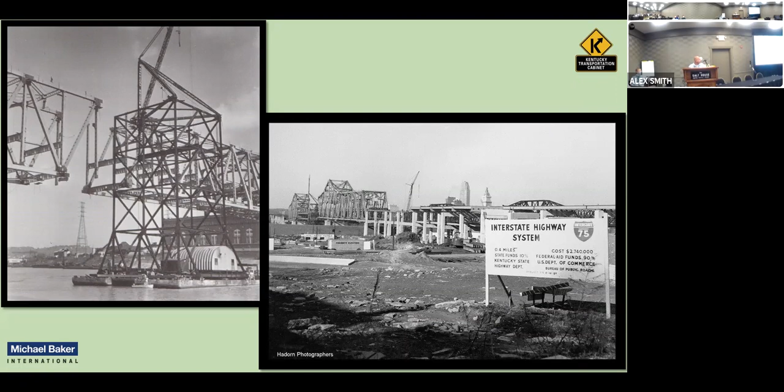A little history on the bridge: this is I-75 over the Ohio River between Covington and Cincinnati. Opened in November 1963, it is a steel cantilever truss with riveted construction, 4 lanes of traffic, top and bottom deck, carries about 160,000 vehicles a day. It is a big piece of infrastructure for probably the whole eastern United States.

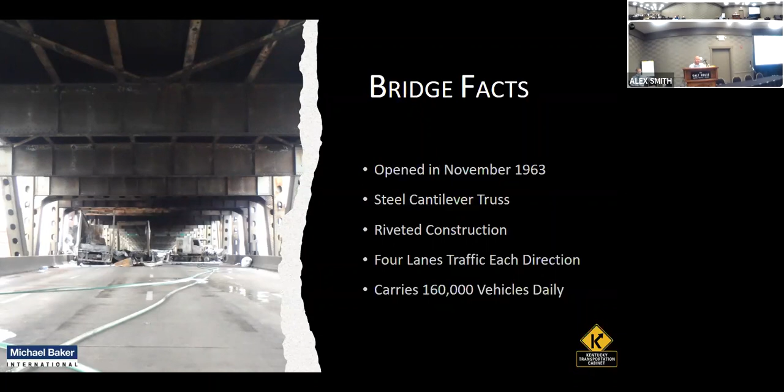So, pretty special bridge. The fire limits - we focused mainly on 4 to 5 panel points. Incident limits on the upper deck were between around L16 prime and L20 prime, as well as on the lower deck. That just shows you a typical elevation view of the bridge, top and bottom deck.

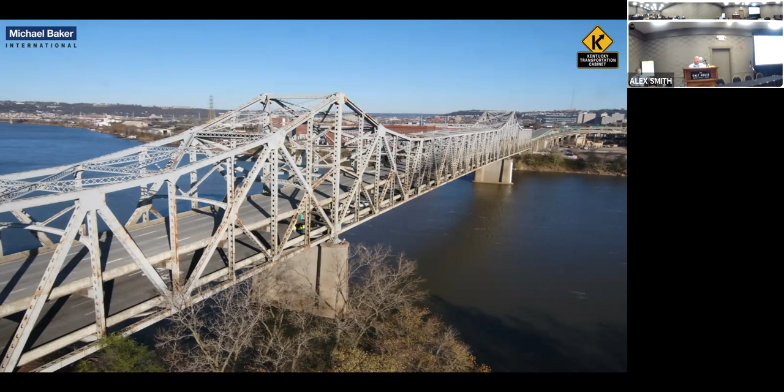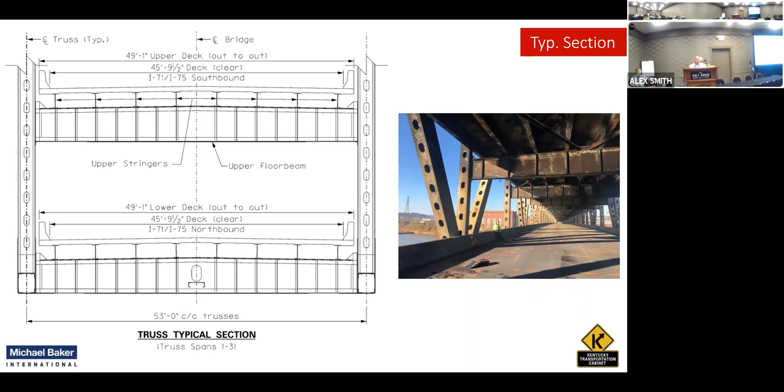We did utilize UAS inspections during this, which was very, very beneficial. Here's a typical section, floor beam, top and bottom deck, about 49 feet out on the deck, and like I said it's 4 lanes. Let me try to see it.

So we knew when this crash occurred, we had to act quickly. When the governor and I spoke on Wednesday before the press conference, he said, Jim, we want to get this job done and we want to get it done quickly, but it's got to be done safely. And that became a touchstone for the entire project.

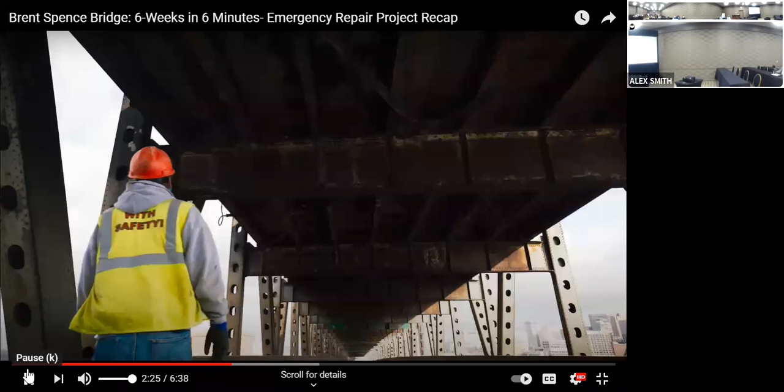We sourced these steel beams from 4 different mills in the country. The contractors visited the site to examine it on Saturday and Sunday, and they gave us a price on Monday morning. Right now, the other bridges are having to shoulder the load that Brent Spence Bridge usually handles.

The traffic control is a major part of a project. If this were a scheduled project where we were going to replace a portion of the deck on the Brent Spence Bridge, we would have taken months to determine the traffic patterns.

We had hours. We contacted Bob Yeager, our chief district engineer from the state highway department, and he helped us coordinate state resources to get out there with directional signage, crash trucks, and he came out there and helped us facilitate the detour around the 275, 471 corridor.

I'd say there were 3 projects in my mind. There was the bridge inspection and repair project, there was the traffic maintenance project, and there was the communication project. My role was to oversee all 3 of those and make sure that information was shared not only within, but between each of the groups so that we could coordinate them.

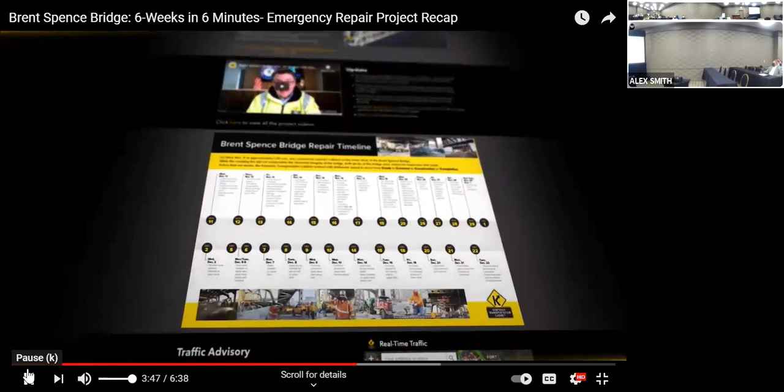The Brent Spence Bridge is such a nationally prevalent bridge, there were people even beyond the local area that needed to know what was going on. We established a dedicated website and made an effort to put out consistent visual content so that people would know exactly what was happening on the bridge. They could track along with us, and they needed to know how else to keep crossing the Ohio River.

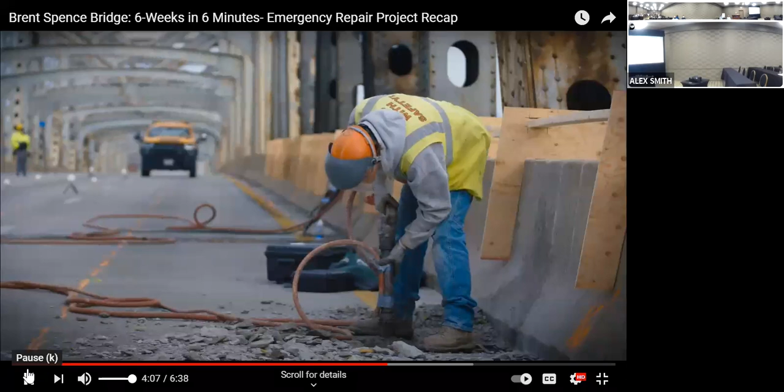It wasn't a complex project, but the conditions were complex. The removal of roughly 8,000 square feet of concrete, removal of these steel beams, the replacement of them, the replacement of the barrier walls, but it was under a very constrained, very demanding schedule on a tough site.

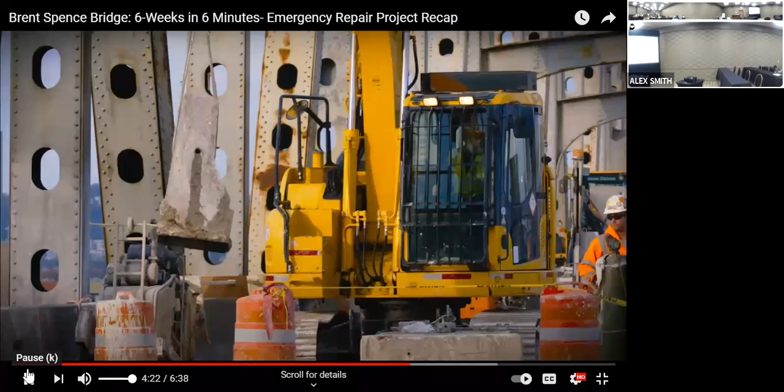Throughout the construction process, a lot of people were saying, well, I'm never gonna drive across that bridge, I didn't trust it before, I'm not gonna trust it now. I think the structural integrity of that bridge was ever proven during this event, because they went in and basically surgically removed the damaged portion of the upper deck of that bridge, and the rest of the structure remained intact and stood there. It was very obviously structurally sound.

What impressed me the most was the expediency and the effort and the cooperation that we got at all levels. Working with two states, trying to get something done would typically take at least a few conversations. Everybody was on board, not asking why, but how. How can I help?

The plans for the Brent Spence are not to remove the current Brent Spence, but to build a companion bridge to the west. It needs some relief, but it's really a capacity issue.

We were surprised by the response that we got opening day. People really appreciated the work that was done. It was more than just getting the bridge back open, but I think they really appreciated the people and the sacrifice that it took to get it open early and that it was going to be safe.

Thinking about all of the things that we were able to accomplish in 6 weeks, all of that's kind of replaying in your mind as you drive through it. Just a relief that this is real, that it really happened. We were able to get it accomplished, and pride.

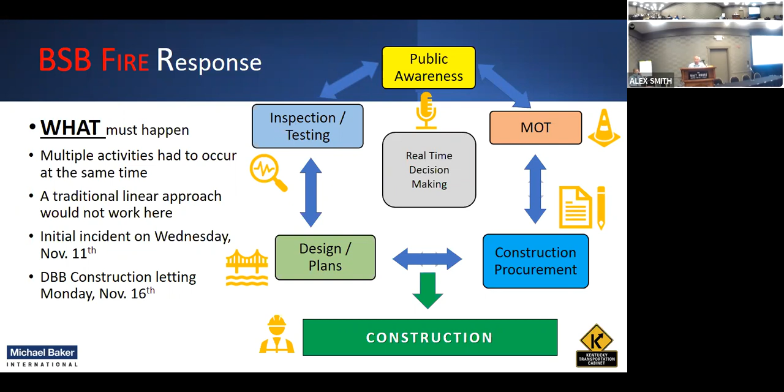Initial impressions — I got a call around 8:30 Veterans Day morning. Nick Rice, our District 6 bridge engineer, called me. He says, 'Josh, you seen the news?' I said, 'Nick, it's Veterans Day, I'm not watching the news.' He said, 'Well, the Brent Spence is on fire.' I said, 'Well, how bad is it?' He goes, 'You may want to get up there.' So I got up there about 9:30, of course being in Boone County. And it was a mess.

We had two jackknifed semi-trucks that collided on the bridge and caught on fire. The lower deck was damaged, and of course we expected replacement. Significant removal was required of that debris — it took a whole day to get all of it out. The smell alone, Jason can remind me of this too, was horrible — burnt tires, burnt metal. I don't even remember what they were carrying, it wasn't much, but it took forever to get the deck cleaned. It took all that first day, Veterans Day.

It even went into the night to get that deck cleaned and all that debris moved, so we could even start the inspection.

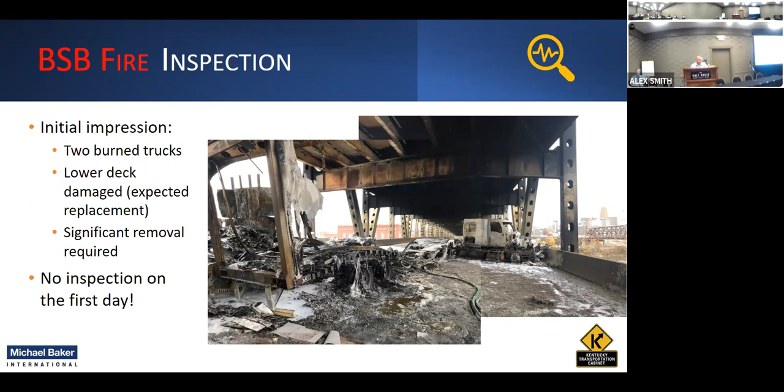That actual night we sat around late trying to work up how we were going to tackle this thing. I called Michael Baker, and we all sat down at some restaurant that night and started planning what we'd have to do. We knew this was an emergency inspection, but it wasn't the same as a typical special inspection or fracture critical inspection either.

Several factors came to mind: priority one was safety — safe for pedestrians, safe for us to even be on the deck to inspect, let alone safe for traffic to cross it. Priority two was taking those inspection results and determining what needed to be repaired, replaced, or fixed. Late that night we just grabbed some napkins and a pen and started writing stuff down.

So HAZ — that's the heat affected zone, the acronym we determined. We had a pretty good location of where the fire was, so that was our main concern, looking at those fire limits. But of course, on the upper deck and lower deck, we were looking for typical concrete deterioration, delaminations, and cracks in concrete. Floor beams, of course primary structural members, were a big concern, along with the stringers and truss members. There are pin hangers on this bridge, and even the finger joints — L17 prime was right at the suspended span, right at the finger joint.

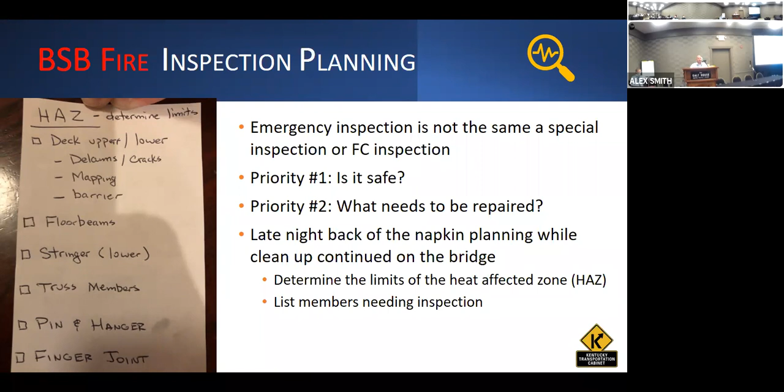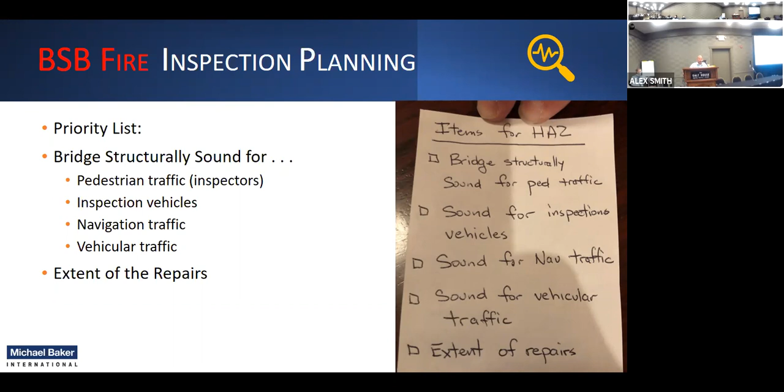Our priority list, like I mentioned, we wanted to make sure the bridge was structurally sound, not only for pedestrians, us being on the deck to inspect and do our work, but also navigation traffic. We shut down navigation traffic because we didn't know if this bridge was going to fall within 10 minutes or it wasn't going to fall. So navigation traffic was shut down. Of course, vehicular traffic was our big concern as well, and the extent of the repairs.

Talk a little bit about what it took to get this done so fast from an inspection side. So when I got there on Veterans Day, I was already thinking, this is going to be a challenge to get this actually inspected and find the results that we need to move forward to replace and fix.

Big shout out to all the consultants I called. It was Burgess and Niple, Palmer was there, of course Michael Baker, Stantec. I think at one point we had about 20 bridge inspectors on site, on this bridge from end to end. So this was a special emergency inspection.

We wanted to mainly focus on that heat affected zone, but also we knew it wouldn't hurt to look at this whole bridge since we didn't know what else was going on with it. So we had 4 teams of 2 inspectors, looking at the lower chord, the upper chord, and of course looking at movement of bearings and wind locks, anything that could have been affected from this fire. We started at the end and worked toward that panel point 17. We knew that's where the truck was.

We developed and organized inspection teams and packets. Every morning I met with all the team leaders at 8 o'clock just to go over previous day results. During the whole day, I was on the phone trying to manage all the inspection teams, and I was talking to upper management.

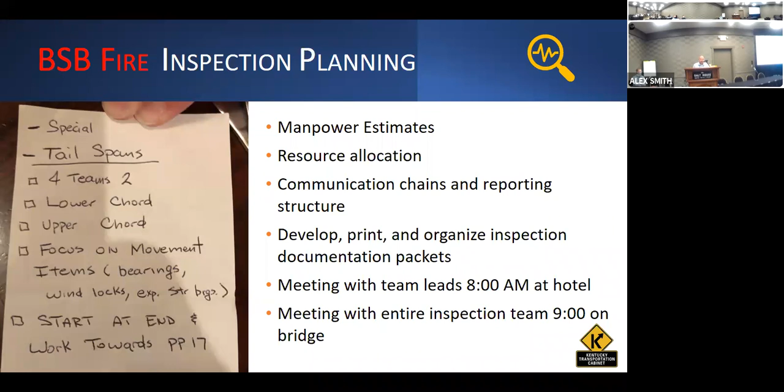From the inspection standpoint, what were we looking for? Paint charring from the heat, from the fire, concrete, buckled members, and of course joints, bearings, and wind locks, and that kind of stuff. So primarily a visual inspection, but then we did incorporate material testing that we'll get into here in a bit.

So we did obtain steel core coupons, concrete cores of the deck within the heat affected zone, and also non-destructive testing at additional locations within the heat affected zone, and control samples outside the heat affected zone. We took core samples of steel and concrete to get a baseline. I think Jason will get into that in a bit.

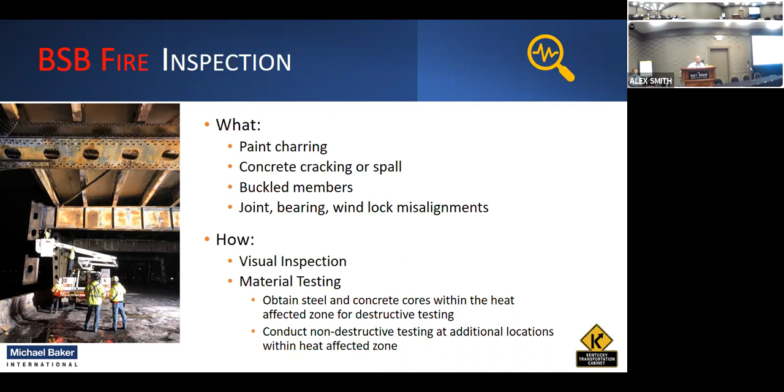So on the lower deck, we took 6 cores. That assisted us in defining what the limits of that heat affected zone were. But it also helped us determine the depth of the overlay and location of the steel in the deck.

One of the lessons learned from those concrete cores, we took cores right down the center line, and looking back, we probably would have wanted to take some along the gutter line, because that overlay thickness did change toward that gutter line. It wasn't a constant thickness.

So the concrete deck and the lower deck was not compromised, even though it looked like crap. The fire pretty much just peeled up the overlay. So we knew the lower deck was pretty good shape. The upper deck didn't turn out to be that case.

We took 8 cores again along the center line to test for those compression strengths. That assisted in defining those repairs, determining the depth. The upper deck was heavily damaged.

I remember like day 2, we were out there, maybe day 1, I can't remember. They were still washing off the top of the deck to remove all the debris, the emergency services, fire department. And it sounded like, it even looked like rain coming down through the deck.

Water was just percolating right through the deck. It looked like a thunderstorm coming through there. So we knew that upper deck was compromised. It was just water pouring right through. So it was heavily damaged, and we knew it had to be replaced.

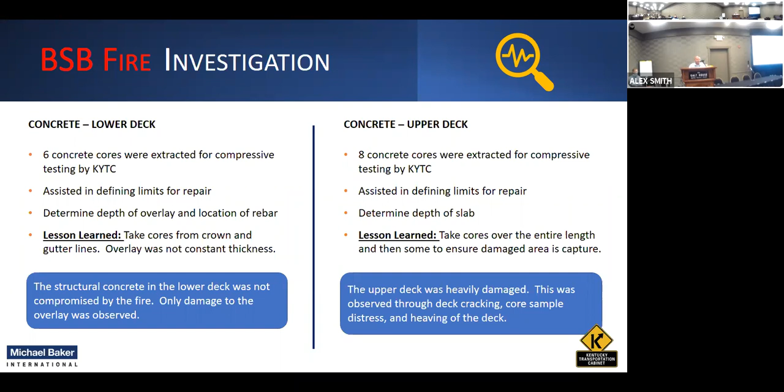Of course, concern was the fire and what it did to the steel, what it did to the concrete, what the strength of that steel came out to be, or what it was after that. Of course, we knew there was a rapid decrease in that yield strength depending on how hot that fire got, and the inability to carry the dead loads at elevated temperatures. Quenching of the steel was our biggest concern, because we did not want that to form martensite, which makes that steel really brittle. And once it gets brittle, it can crack like glass. So that was our biggest concern.

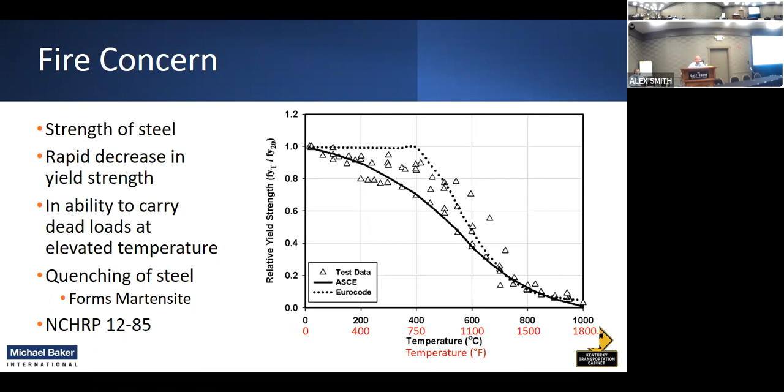So yeah, fire concern again. What's the source? What's the temperature? How long did it happen? And where's it at, you know, proximity? This is one of the fires that happened on I-85, and it actually collapsed one of the spans right there. So depending on the duration of the fire and how hot it gets, it can be a big issue.

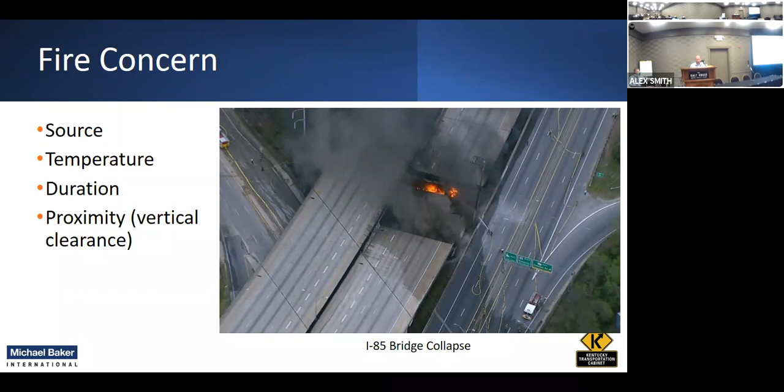So after we did our inspection, we did some metallurgy analysis and took those steel core samples. Luckily, we did not see any change in steel properties because of the fire. Looks like it did get below about 1,200 degrees. So that's a maximum reduction in strength, 10% for hotter fires. And then we could reuse it if distortion's not too severe, with 90% of yield strength.

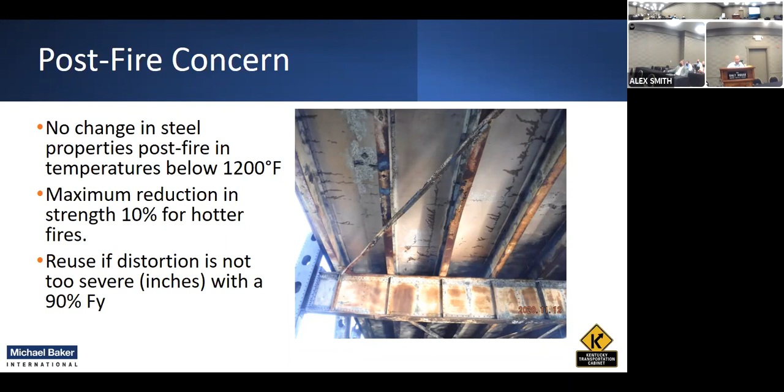This is just a little PennDOT study we wanted to add in here. It talks about the effects of fire damage on bridge steel. Several pictures there: before the fire in the bottom left corner, after the fire at 800 degrees, and then washing the surface, brushing the surface is also included. So it's a pretty good guide for post-fire inspection.

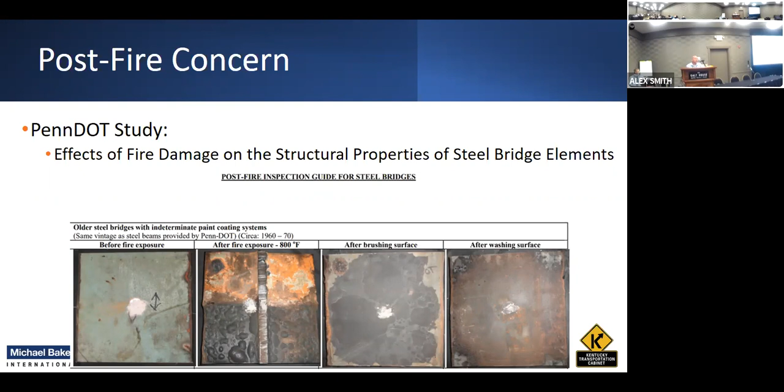So all in all, after our inspection, prior to the incident, we had the bridge rated all 5s on the deck, super, and sub. But we knew there were still some issues with that steel because it was a fire, it still got hot. So we ended up taking the deck and super to a 1 imminent condition for an NBI rating. And we thought that was pretty fair considering what we were seeing.

Of course, we did inspect all the steel members for heat damage, distortion, that kind of stuff. And as I mentioned, the inspection access we had involved over 20 people, including KYTC and consultants. It was a big hands-on deck.

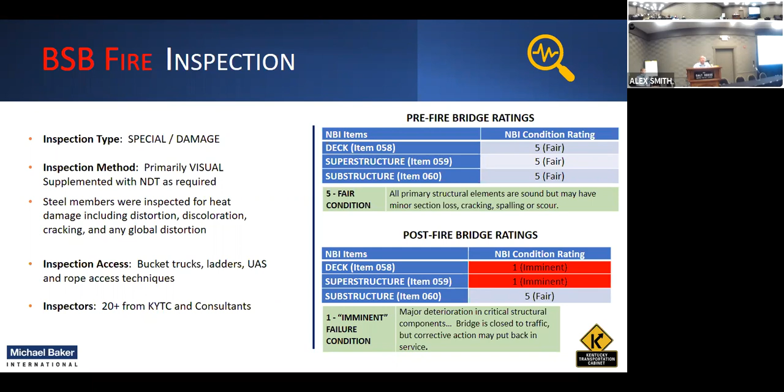So one of the things I think that was pretty interesting, even with everybody out there, consultants and KYTC alike, and I think even the public, they knew this was a big deal. Everybody put their heart and soul into it, put our blood and sweat into it. This was a big concern, and everybody wanted to get this thing inspected, analyzed, and repaired as fast, safely, and efficiently as possible. So it was all hands on deck.

So I think I'm going to turn it over to Jason here real quick, and he's going to talk about the investigation.

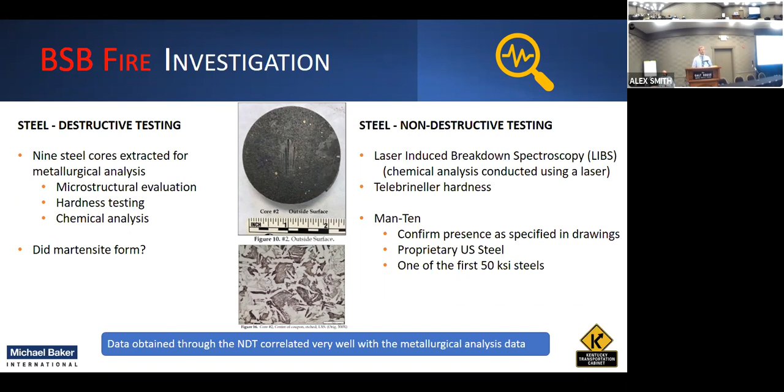To look at that, we did some Brinell hardness testing, seeing if there was a change in hardness, as well as using a laser-induced breakdown spectrometer. Essentially, you shoot a laser and it gives you a readout of the chemical composition of the steel, confirming whether we had this high manganese content and whether it actually was this Man-Ten steel. All of that was confirmed, and it was some interesting data that we produced.

One of the other stories I'd like to spend time on today is about one particular core. In the process of taking these cores out, an interesting thing occurred, actually in the hanger. Josh mentioned that this occurred at L-17, and this bridge has a suspended span, 450 feet over the river, held up by hangers, large structural members on each side of the bridge.

Those hangers have about 5 million pounds in them holding this thing up. While they took the core out of the cover plate for this big box section that's the hanger, a notch, or crack indication, was noted after the core came out. Talking to people, we went through and looked at it, tried to take some pictures, you can see a little bit of it there.

So there was an immediate concern. Why did this little notch occur? Why did this crack occur in the steel? Was this overly brittle? Is this thing going to propagate? Do we have additional issues from this fire that we don't understand? The people doing the drilling have done this many, many times over their careers, and they've never had a notch or crack pop out like this. We're still not sure exactly what happened here, but it was of major concern to us when this happened.

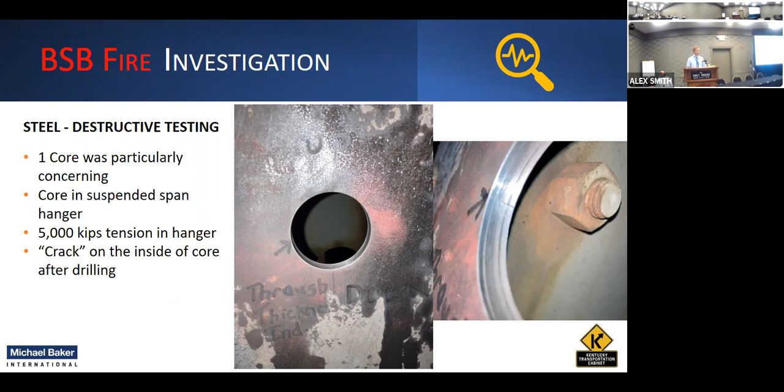It caused us to ask, are we in danger of having this entire hanger fracture, or something else occurring that we need to be more cautious of? We actually went back and shut river traffic down, on the account that we could drop this suspended span if this hanger were to fracture.

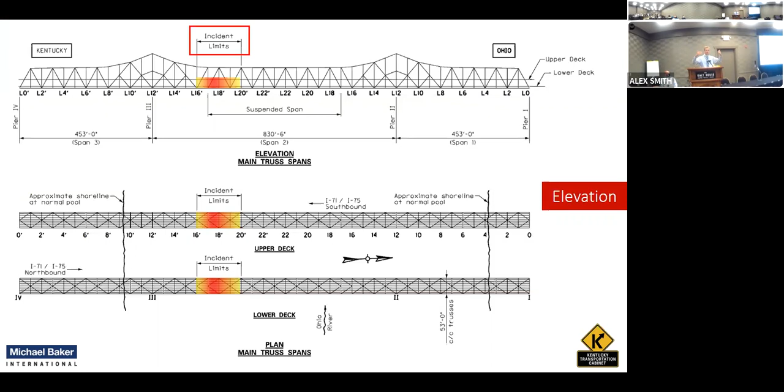Showing this picture that Josh showed before, you'll see that suspended span in the middle of the river. The heat effect from the fire occurred right in the middle of this thing, and the concern was that suspended span would fall. It's a simple span portion of the construction — cantilevers built out from the sides in the original construction, with that suspended span placed in the middle.

So what we did is we took these steel cores and they ended up making a steel puck. We brought them back down to Louisville here, where there's a testing facility. They cut small slivers of that steel out and made a puck that was about a 1 inch diameter.

There's a black medium of plastic that goes in there, and they polish this thing down. The polishing process was pretty fascinating.

When they grind and polish this thing down to the microns, they have a polishing cloth, but the liquid they drop in there has different diameter diamond bits. They'd have like 3 micron diamonds suspended in a solution and rub this thing with it. Then they cleaned it all up and finally got down to 1 micron diamond dust, grinding this thing down to a glass finish and put it underneath the microscope.

They were able to say, hey, there is still some paint on this sample. That essentially tells them that the fire didn't get above that 1200 degree threshold, at which point the fire would burn off the paint on the bridge. Since there was still a little sliver of paint left, that gave an indication to the metallurgists of the temperature the fire reached in that portion.

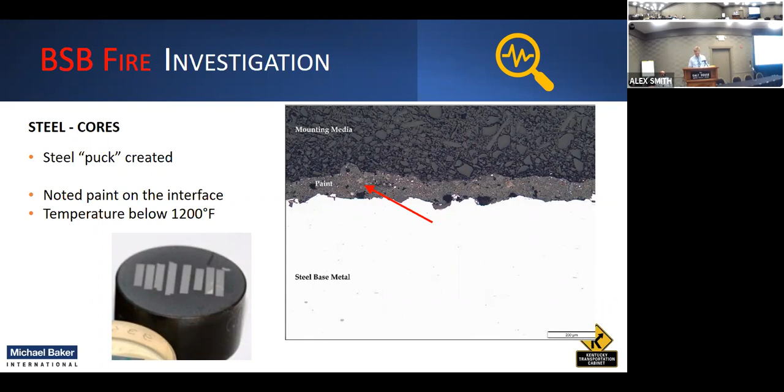So everybody who knew what they were talking about was happy and said, oh, we didn't have a change in steel. The structural properties haven't changed, and we shouldn't have a concern. At that point, we were happy.

We could then go back and report up the chain that whatever that little notch or indication was, it was an anomaly. They went and cleaned it up. We do not have a concern that they changed the properties of the structure, and they could reopen it to river traffic. There's as much commerce running underneath this bridge as over the top of it, which is a major concern for all parties involved.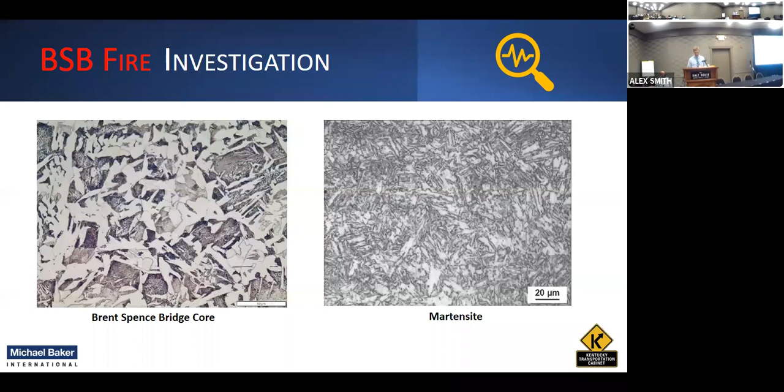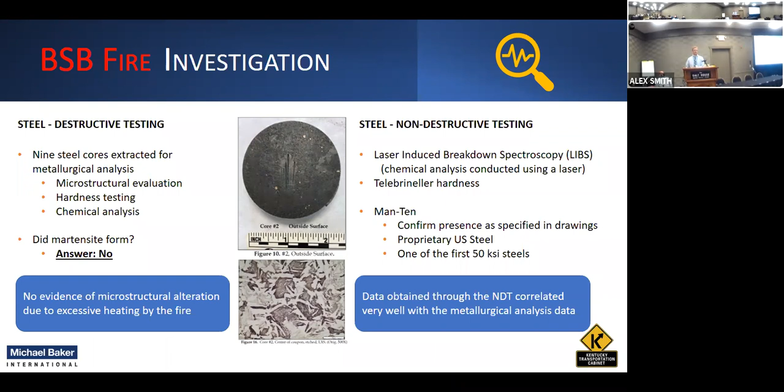So that was kind of the story of the steel and how that occurred. In the end, we did not have martensite form, and there was no evidence of the structure altered due to excessive heat. So the project was able to progress forward from the inspection side, saying, hey, this is where we're at, and we should be able to move on.

So it's a pretty quick process once we got the NDT team on site, and they could do quite a few locations in a short period.

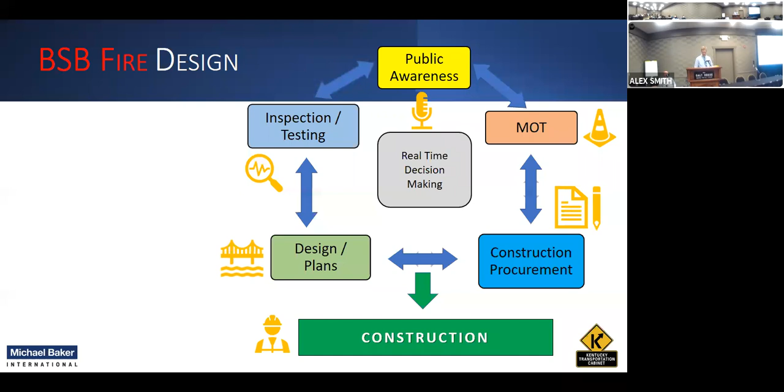Want to move on here to design, the next part of this thing. Within the design side, we had to rely on the inspection team to provide information. What is the extent of damage? What needs to be replaced? What is the scope of this project? And then from that, can you provide the details that we need in order to do those repair plans?

So the design process required a lot of coordination. There's a lot of meetings and calls between the field and the office. Hey, can you go check to see what the plans say, what is the field showing? But we essentially said, if it isn't broke, don't fix it. Let's use the existing plans. In these type of situations, the best thing to do is pull out those old plans, pull out the shop drawings.

Let's annotate that stuff. Palmer Engineering had done a previous project to do some replacement on the joints. So they took charge of all the joint replacement and joint portions of this project, and were able to take portions of that project that was ready to go to construction and roll it into the project to replace those areas and things that needed to be fixed on this project. And that worked out really well.

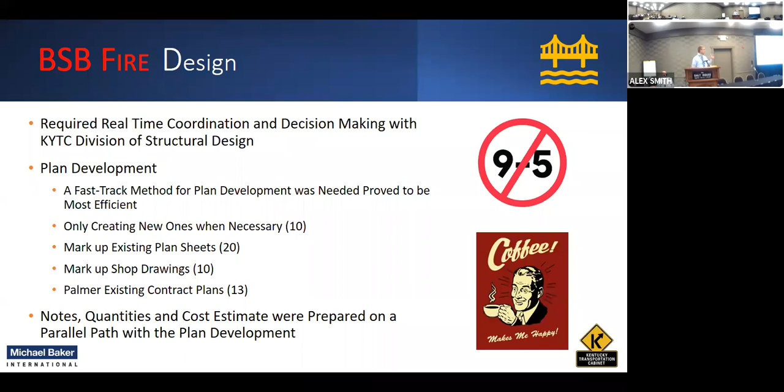So we did create a few new sheets. We marked up existing sheets, existing shop drawings, running all that in parallel, trying to get that to come through.

The electrical portion of this actually was a good indicator because it had lights on that lower deck all the way down through the bridge. Those are plastic fixtures, so you could very quickly, during the inspection, tell hey, the fire got hot enough to melt the plastic at these sets of lights, but that light down there is not melted. So we can kind of start limiting what is the temperature. And not only is the paint removed, but what is the plastic on these lights doing? How far does the conduit go? How much of this electrical stuff was damaged? Again, giving us an indication of the extent of our scope and of the project.

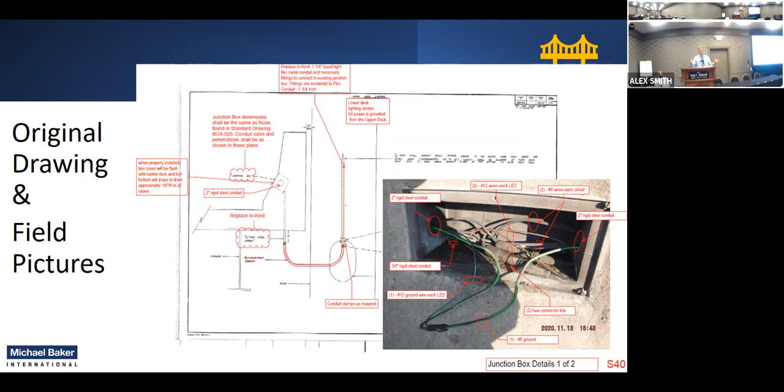The shop drawings, similarly, we took the old shop drawings and said, hey fabricator, use these shop drawings. We need a new stringer. Here's the original one. You know, these old guys drawing this stuff by hand knew what they were doing. They made great shop drawings, and it worked out really well to highlight, this is one of these big, massive old shop drawings. Use these sheets, here's some additional notes, here's the paint quantities and the painting that needs to be done, etc. Let's replace this and kind of move forward.

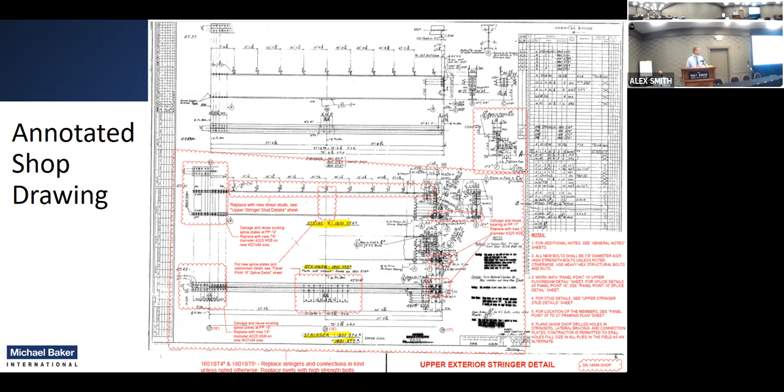So I mentioned the hanger, right? So we had the hanger that had that crack in it. One of the first things that happened while we were running around trying to figure out whether the steel had changed was to find out how critical is this hanger. So the picture there on the right is the actual hanger. It's a box section, right? It's got 6 structural plates, 3 plates on the inside and outside of that, and then the cover plates, perforated cover plates that make up that box.

And so we went through an analysis to look at the internal redundancy of it. Recently, within the last 2 or 3 years, AASHTO has new redundancy guidelines. The AASHTO guide specification for internal redundancy of mechanically fastened, built-up steel members is the publication. And so what we did is we said, let's suppose one of these 6 structural plates cracks and breaks.

Can the other 5 handle the loads from this? Because of the speed of the project, we didn't have full models and understanding of the exact loading. We had the original loading that was provided, and given that, the member was internally redundant. Now, the original bridge had 3 lanes of traffic in the upper and lower deck, which has since increased to 4 lanes, increasing the live load some. We made some estimations, but in the end we felt this was still an internally redundant member, removing the worst case scenario, which gave us additional comfort in making those decisions.

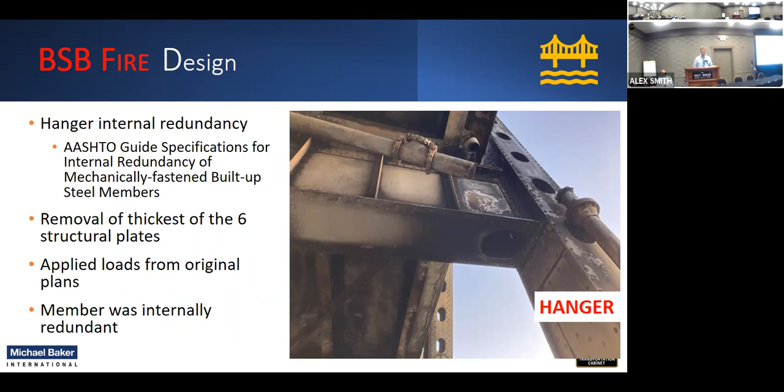Document control was an important part of this. We were producing plans about every 12 hours, providing them to KYTC around 7 in the morning and 7 at night, and documenting these things.

In order to have this done in 5 days, the contractor showed up Saturday afternoon. We gave them a presentation of the scope of work, and they were supposed to have bids Monday morning. That ended up being noon on Monday, but the contractors had very limited time. So we were providing updated plans to those contractors and to the state, while still in the process of developing what you saw.

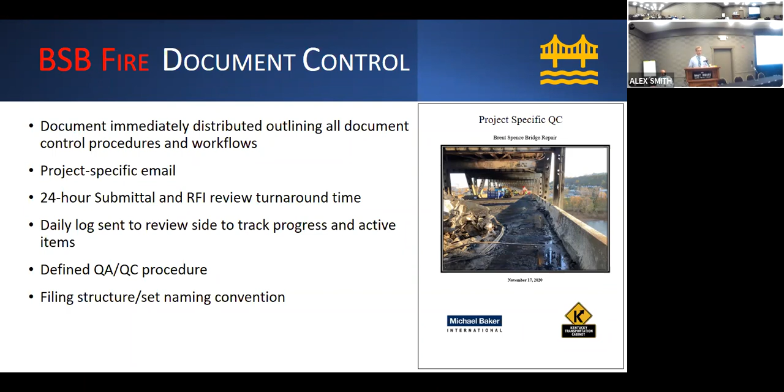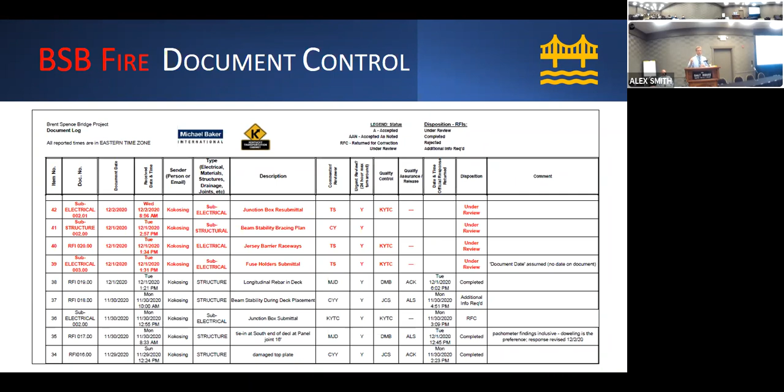Once it went into construction, we made sure we turned around all submittals within 24 hours, whether shop drawing reviews or other things. On fast track projects, you've got to be able to track it—you can't have things falling through the cracks. So we had our spreadsheet, and we tracked every submittal and RFI coming in and out, turning those around as quickly as we could. If the contractor had questions, we answered them, making sure nothing fell through the cracks, so the inspectors in the field and KYTC personnel knew the status of each submittal, each question, and the resolution.

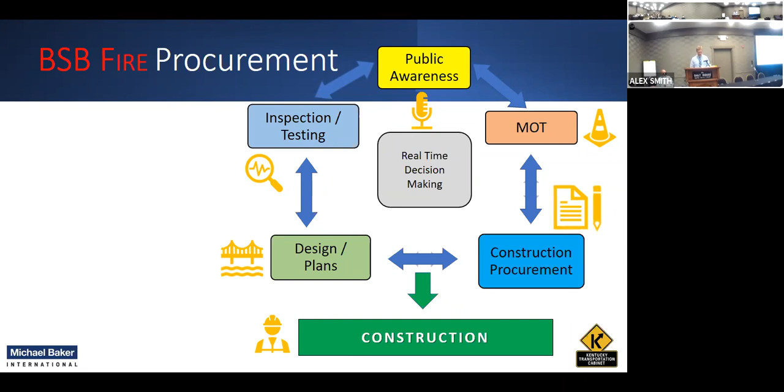So that's the major part of the project, and I'm going to go through the rest of this quickly. Some of you have seen a lot of this presentation already. Josh and I wanted to focus more today on the technical sides of inspection and design, but I feel like it wouldn't be a complete presentation unless we ran through the rest of the story, starting with the procurement portion.

We got some steel purchased the Friday after the fire occurred on Wednesday. So 2 days later, KYTC purchased some stringers, knowing we would need them but not knowing how many, and not wanting that steel to go away since we were months out on the rolling schedule. There was some available at some of the yards, so they went ahead and pre-purchased steel even before the contractor was on board.

Kokosing Construction was the low bidder at a little over $3 million, and they submitted that Monday at noon. We had our pre-construction meeting that afternoon and got started.

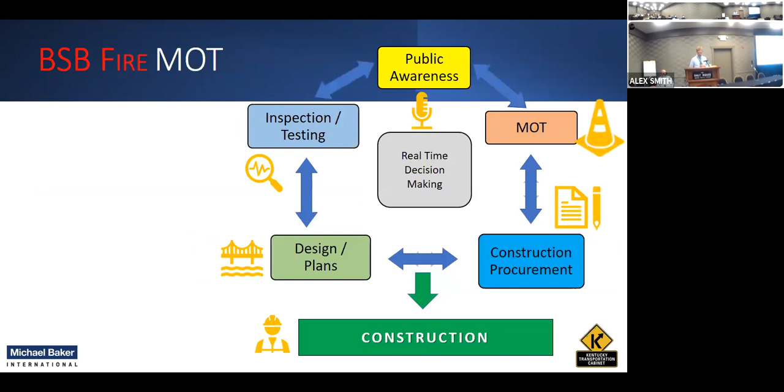MOT was mentioned as a major component of this. It was, right? 160,000 vehicles had to be detoured around a downtown urban area. So Kentucky took that burden off of the contractor—Kokosing was not responsible for MOT. Kentucky handled it for the Kentucky side of the bridge, ODOT handled it for the Ohio side, and the states maintained and ran this.

They modified it as they went to meet the concerns of local officials, and took in a lot of comments from the general public to try to optimize it. As it got to snow and ice season, they modified it to make sure snow and ice removal accounted for the fact that they couldn't close any shoulders, so emergency vehicles had additional access.

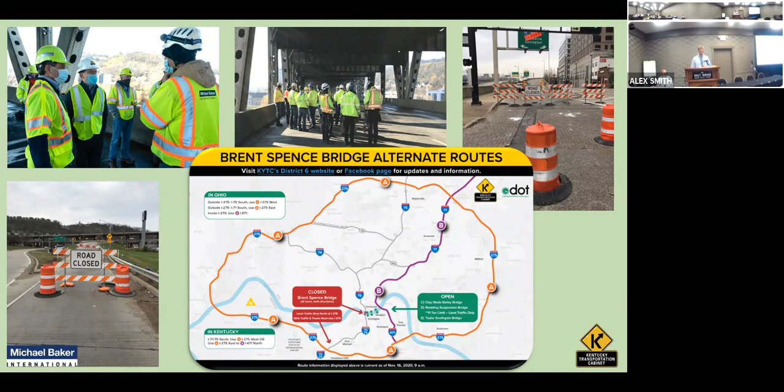Did a really remarkable job on that part of the project. Moving on through it just due to time.

Public awareness was another big part of this project that went above and beyond. They had a dedicated website, but what I want to say about public awareness is that they focused on the people. There's the nuts and bolts of these projects that us as engineers like to talk about, but it's the people that the public connects with. KYTC did a really good job focusing on the people doing the work and what had to be done, telling the story from their standpoint and through their eyes. People really connected with that, and it worked out really, really well.

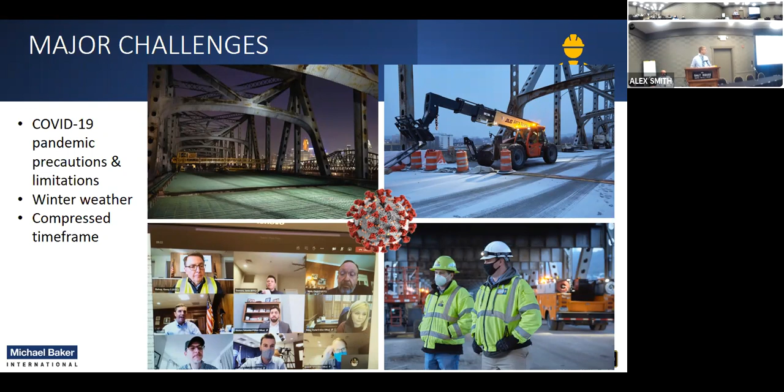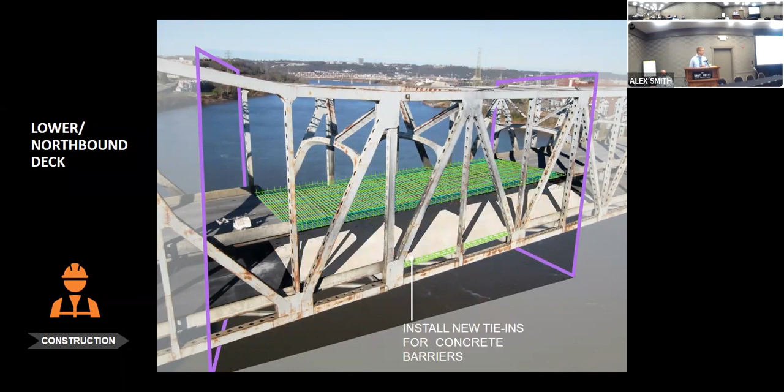The construction happened not complicated, but in a complicated situation. We had COVID, extremely tight time schedules, and the weather. They worked through those things to come through this. They took off the lower deck, replaced the stringers, formed it all back up and placed the concrete. They removed the overlay on the bottom deck, fixed the barriers where the trucks had crashed into them and the fire had occurred, and were able to open it back up. So that was quickly the scope of it and what we had to deal with.

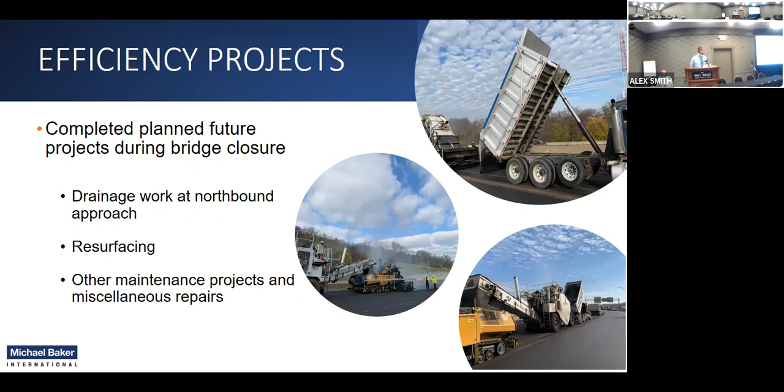They did some additional efficiency projects while the bridge was closed down, and that worked out very well for KYTC and all those involved, and opened it one day early. So in the end, it took a lot of leadership, communication, and teamwork to make that happen.

I like this quote: never tell people how to do things, tell them what to do, and they'll surprise you with their ingenuity. As Josh mentioned, everybody jumped in on this project and asked, how can we help and how can we get this done? And it happened. At the executive level, it was mentioned in the video, we had to open this bridge quickly but safely. The leadership at the top levels made the goal of this project clear, knew exactly what we wanted. Everybody stayed focused on that goal, and it had to happen.

From a company standpoint, anytime you say yes to one thing, you say no to everything else. So in order for a company to say yes to this project, you have to say no to other things that you were doing in your life and in your work. You have to have leaders that can say, I will make sure that this other stuff gets done, we will clear your schedule, you're focused on this important project. And that happened across the board for everybody involved. So I think that's helpful.

We'll move on through this as quickly as I can. But again, communication was important. Josh talked about being on meetings all day long for his stuff, because that's critical and needs to keep everybody informed up and down the chain, and to make sure those things happen. Regular meetings by discipline and leads.

In the end, we did finish this ahead of schedule and under budget, with overwhelming positive support. Talking to several people at KYTC, they said normally the only feedback they get from the public is negative, why didn't you do this, this is bad for my day, you closed it down or whatever. We did get a lot of really positive support, and that made everybody on the project pretty pleased with it.

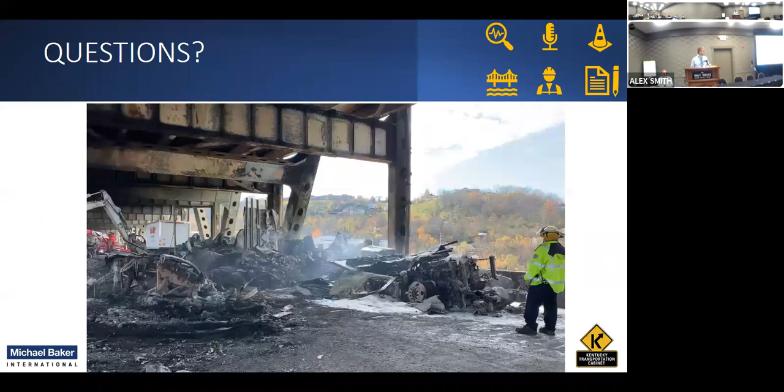So in the end, I'll ask if there's any questions. Probably don't have a ton of time, but if there's any questions, please let us know.

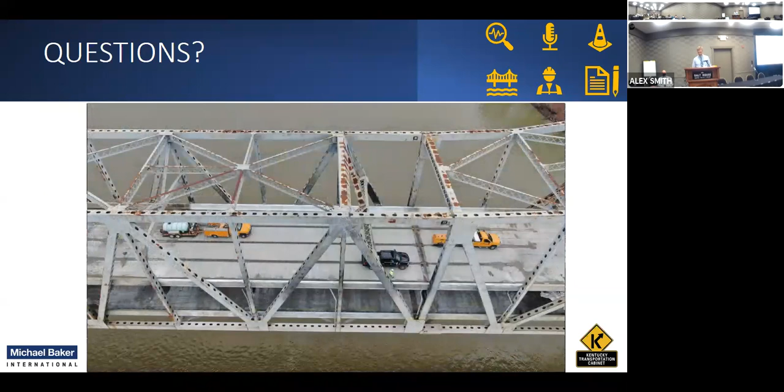Look online, they have that ability to ask questions. They hadn't told me that. If you're online, you're asking questions. Yeah.